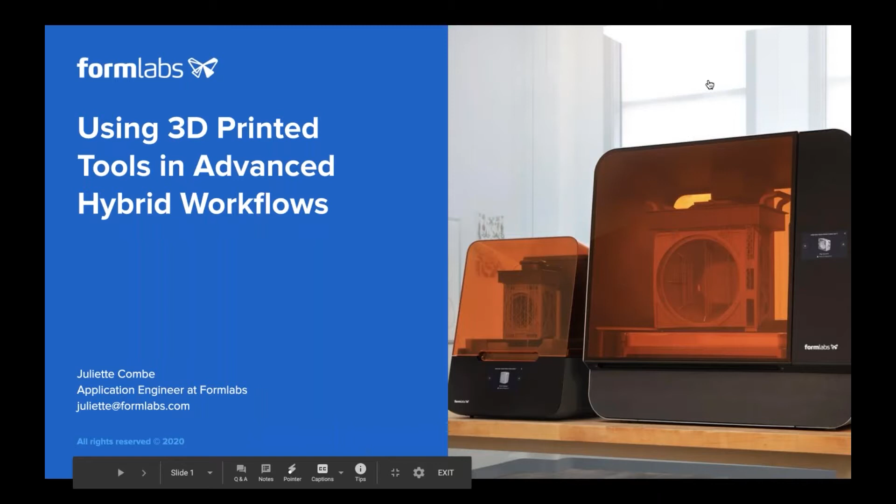Hi everybody and welcome. So thanks a lot for this introduction, Torsten. Yes, so I'm at Formlabs. I'm an application engineer. I'm in 3D printing already for a couple of years, and today I'm doing some research on application workflow, so testing in-house and with customer workflow for new applications for manufacturing and engineering using 3D printing in those industries.

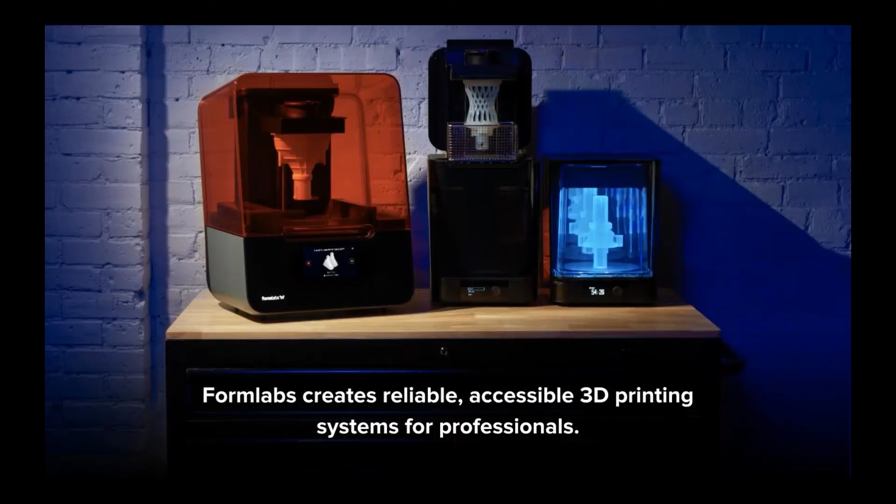So what are we doing at Formlabs? We create reliable and accessible 3D printing solutions.

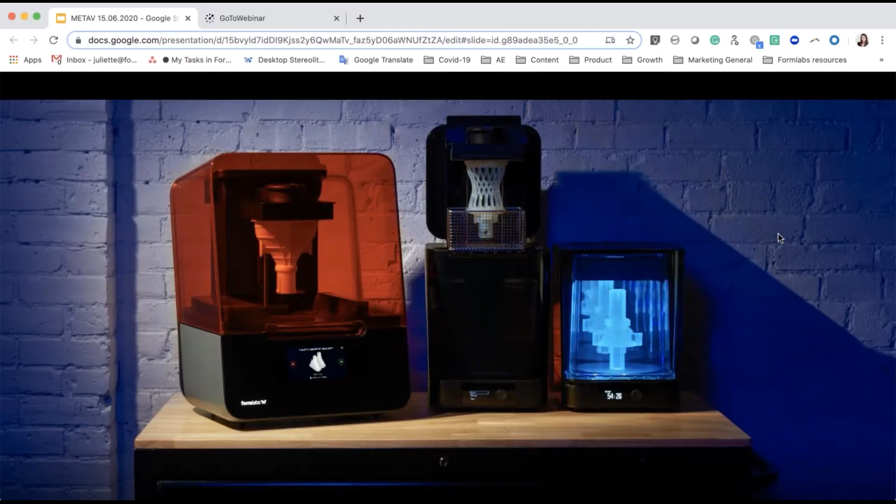Oh, sorry, I cannot switch anymore. Sorry, I just lost the page.

Yeah, that's good. And yeah, we started the company in 2011 out of MIT Media Lab, and now we are more than 600 people. We have 6 offices. The general headquarters is in Boston. The European headquarters is in Germany, in Berlin. We have 3 factories, USA, China, Hungary, and we have hundreds of engineers and scientists.

We manufacture in-house our hardware, our software, and also our materials, SLA materials. So we also have material scientists in-house. And we have sold more than 50,000 printers in more than 40 countries. So this really puts us as market leader for professional 3D printers.

So today I want to talk about first what's our Formlabs solution for manufacturing, and I will give some concrete examples of applications on how to use 3D printing for manufacturing tools. First, 3D printed jigs and fixtures for work holding and finishing, 3D printed molds, and 3D printed dies for sheet metal forming.

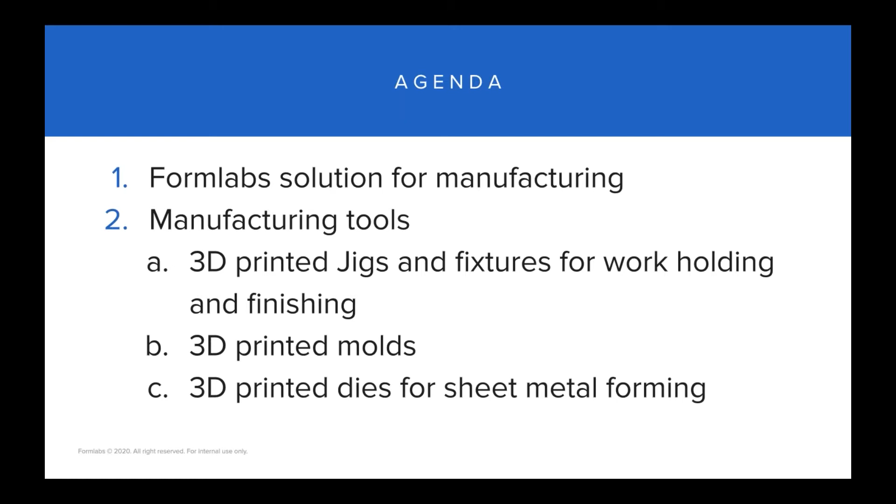So first, an introduction on our product and how manufacturers are using it right now. This is a portfolio of our product. We have 2 different 3D printing technologies, stereolithography technology, I will refer to it as SLA, and a selective laser sintering technology, the Fuse 1, which is still in development.

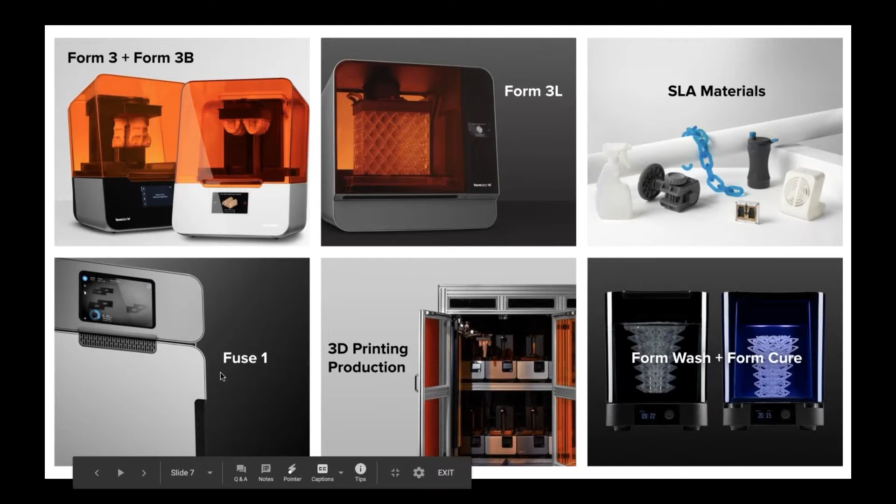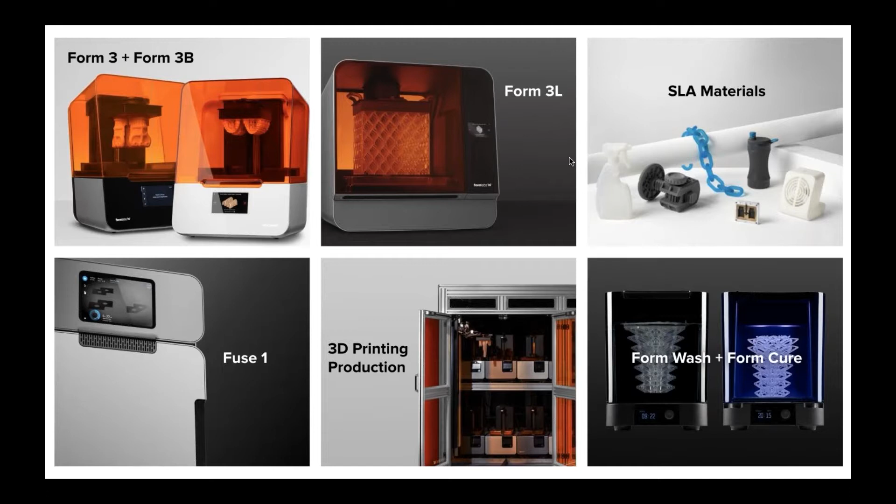Today, I'm going to focus on SLA technology, which is our core product with the Form 3. We also have the Form 3L, which is a large format of this technology with 5 times the build volume of the Form 3. And also, as I said, we manufacture in-house our SLA materials and our post-processing units.

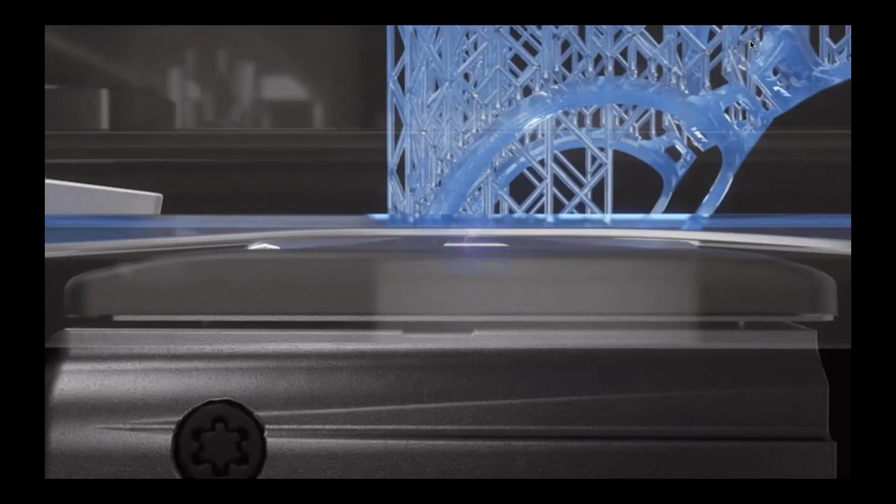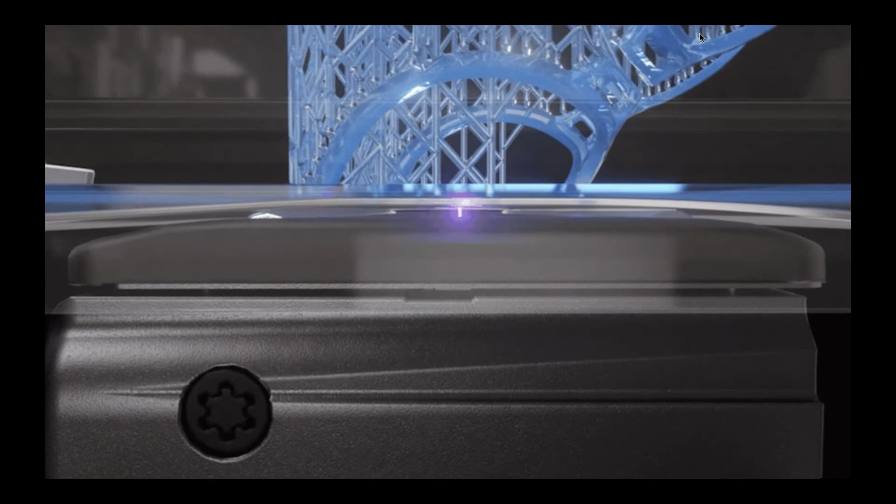So, quick introduction on SLA. I don't know if you're familiar with the process. It's a resin-based process. On the printer, we have an optical system with a laser that comes to a tank of liquid resin and solidifies the resin layer by layer. So the solid part is built layer by layer from photopolymerization.

So the resins are very important in this process, and at Formlabs, as I said, we manufacture them in-house, and we developed different mechanical properties and thermal properties as well for those resins. We have a whole range of different kinds of resin for standard products, but also dental products, healthcare, and special resins. And we have some engineering resins that have technical properties and are very useful for manufacturing applications.

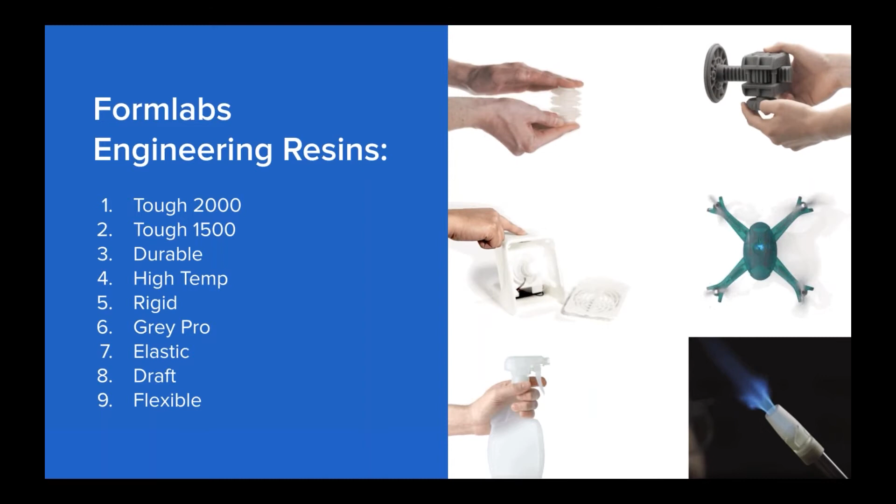In particular, our Tough and Durable resins family are very interesting. We released those materials very recently, actually. The Tough 2000 and the Tough 1500 are some of our latest materials. They are some of our most robust and most functional materials in our library, and are very useful for prototyping, jigs and fixtures, functional prototypes, connectors, and also parts that handle wear and tear. They're very good choices for that.

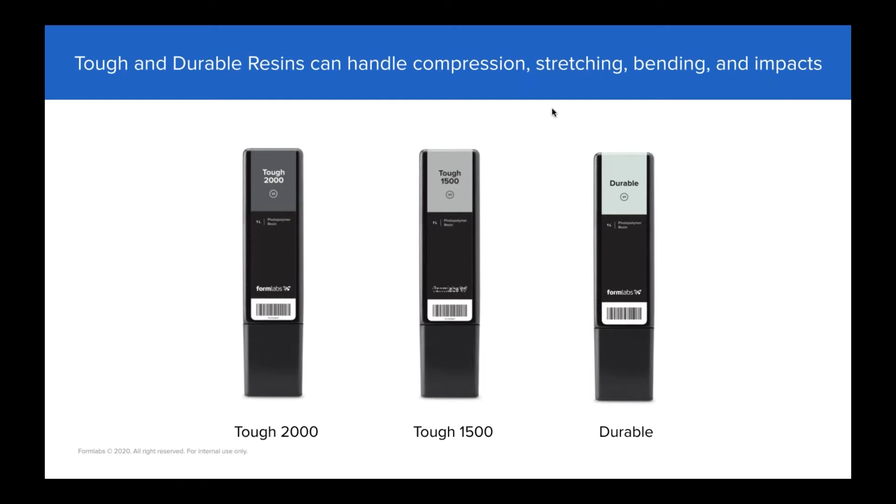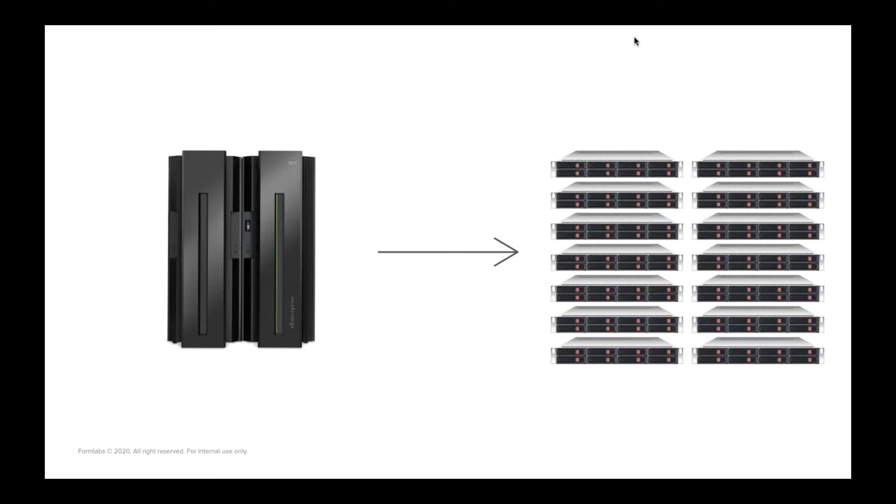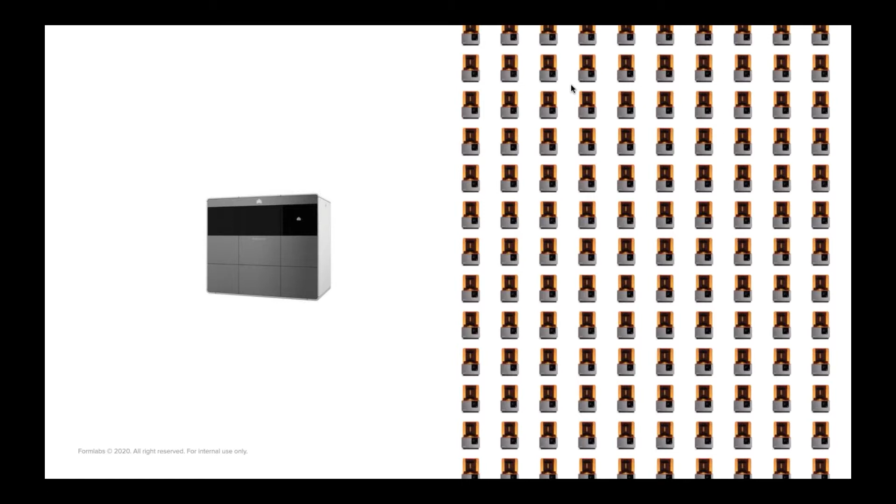For this price, you could have about hundreds of Formlabs printers, and you will have much more flexibility and modularity. So the idea is really to take the power of industrial SLA and bring it to the desktop with small, affordable, and modular units. So we have customers that are building what we call modular 3D printing production in-house on the factory floor. So it allows them to have a lot of scalability and flexibility.

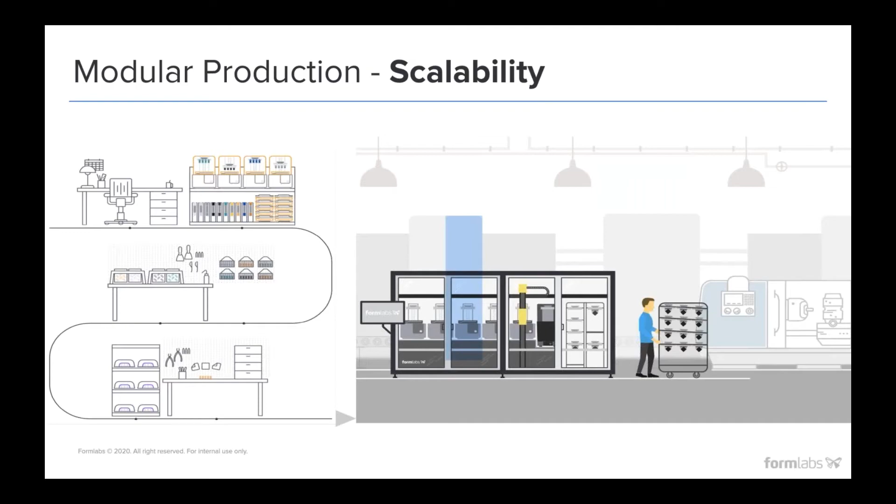So you can start with a couple of printers, and as you discover more use cases, more applications in the factory, then you can scale and add incrementally as the demand grows and the market changes. So this is really how we propose with modular production to do agile manufacturing.

We have a lot of customers that will have a modular 3D printing production on the factory in the assembly, like next to the assembly line, and then also at departments like prototyping or product design. Also for maintenance, so in different departments, so that really gives a lot of flexibility in the product development process.

So the topic of this conference is really about digitalization. So additive manufacturing fits very well here, and it's a really great tool for digitalization for industries. If you're familiar already with 3D printing, you probably know that it's very useful for prototyping, pre-production, communication models, and manufacturing validation. Also end-use parts are very popular, like mass customization and short series.

Today I want to talk in particular about production tools and production aids, so how to use 3D printed parts as a step in the manufacturing process. So this is what we call hybrid workflow. We use a 3D printed part as an aid in the manufacturing process. So it's not about replacing traditional manufacturing processes by 3D printing, but really enhancing this process with the flexibility of 3D printing.

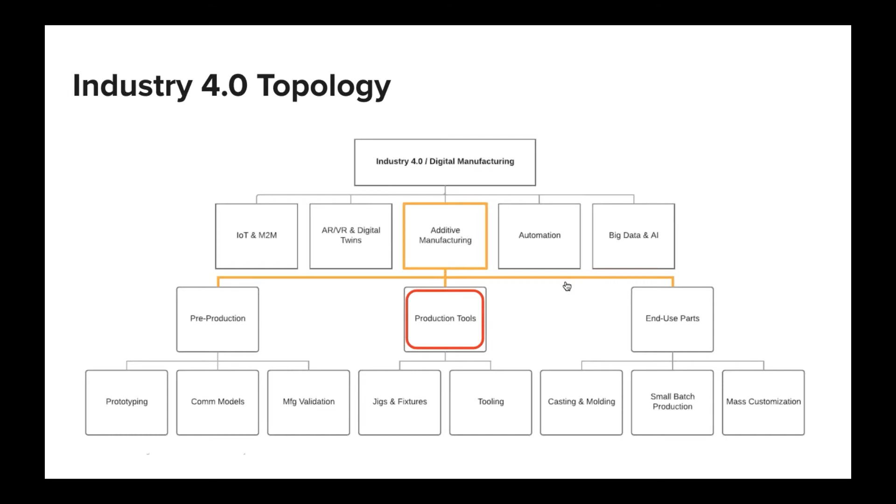So I'm going to give a couple of examples of applications on how customers are using SLA parts today, how they're using a printer in hybrid workflow. For each of these applications, we have some detailed webinars and white papers about it. So if you want more technical details and to dive deeper into those applications, I really recommend watching the webinars and the white paper for each of them.

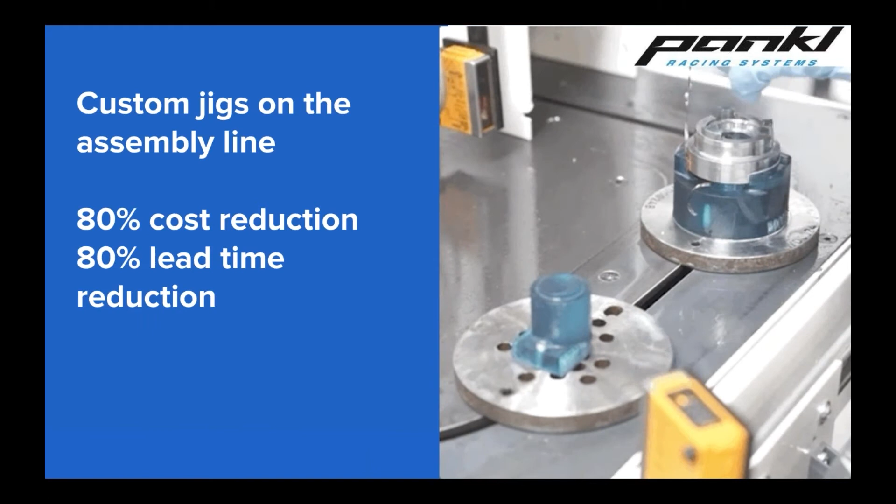But right now, I really want to give an overview to let you know what is possible to do and what our customers are doing right now with SLA printing in the factory and as a step in manufacturing processes. So first, I want to start with using 3D printed jigs and fixtures in the factory. So this is an example of a customer from Austria that is called Pankl.

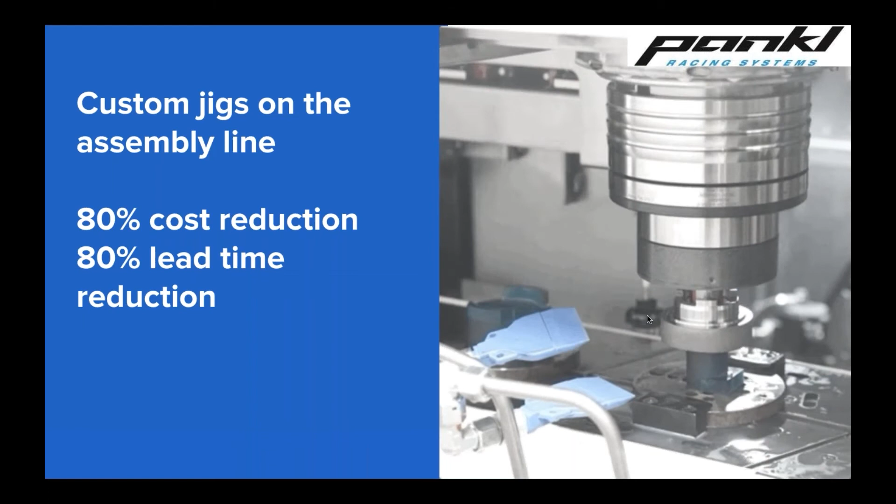They are manufacturing drivetrains for automotive companies, and they were facing the challenge of having to produce thousands of custom jigs for a single assembly line. And with 3D printing, those parts that you can see here in blue that they put in the assembly are printed with the Tough resin that I was just talking about before. So with 3D printing these, they managed to reduce cost by 80% and lead time by 80% as well. So this was a really great added value for them.

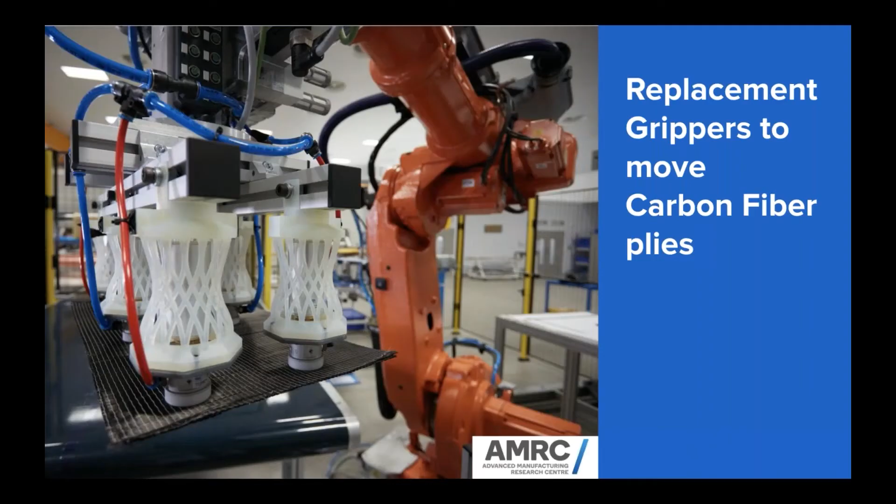Another example is from the Advanced Manufacturing Research Centre in the UK. They were on a project that was under really strong time pressure, and they had to find a replacement part for a robot, so replacement robotic grippers. And this was for a project manufacturing carbon fibers. So they had to align plies of carbon fibers in a very precise way.

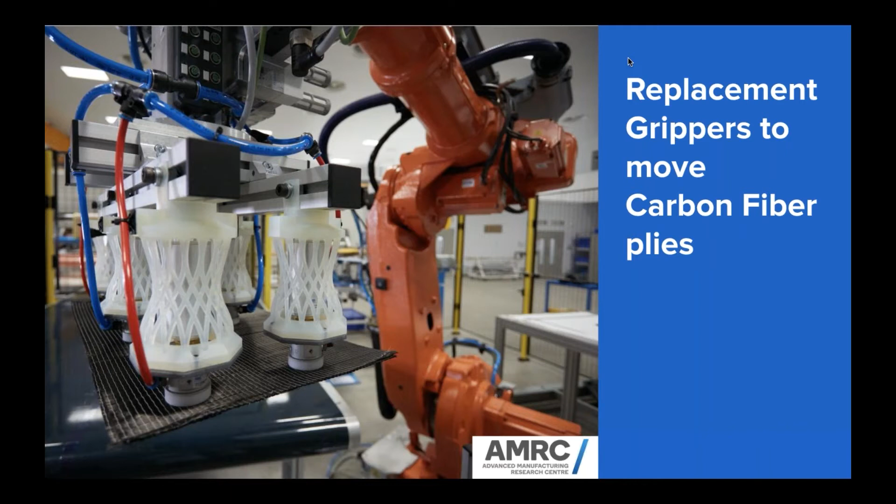And they actually played on the design advantages of 3D printing, so being able to fabricate a specific lattice, and also the different properties of the material. So they needed some stiffness, but also some flexibility in the material to have the precision of the gripper. So they managed to do that with the material and the lattice.

Another example from the Advanced Manufacturing Research Centre was in the process of filament winding. So they were using custom jigs to have the different sizes of filament passing, so just some custom rollers that were also printed with the Tough resin. And this really allowed them to have great flexibility in the different filaments that they were using for this process.

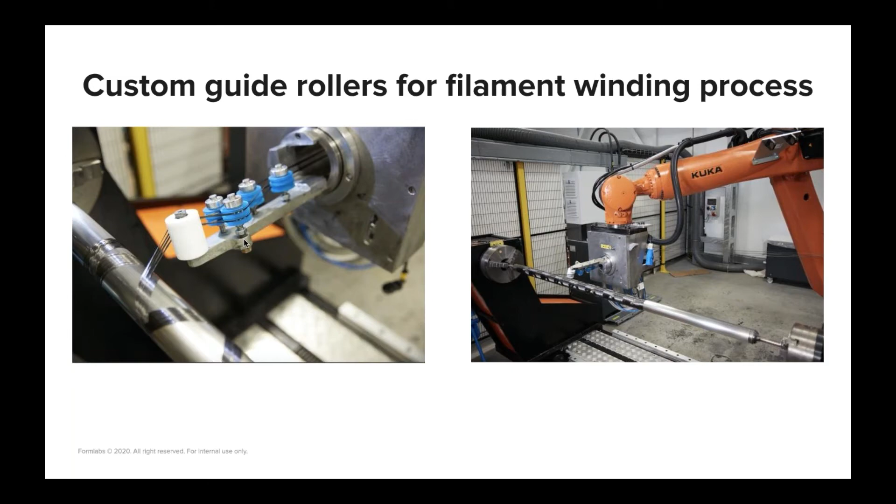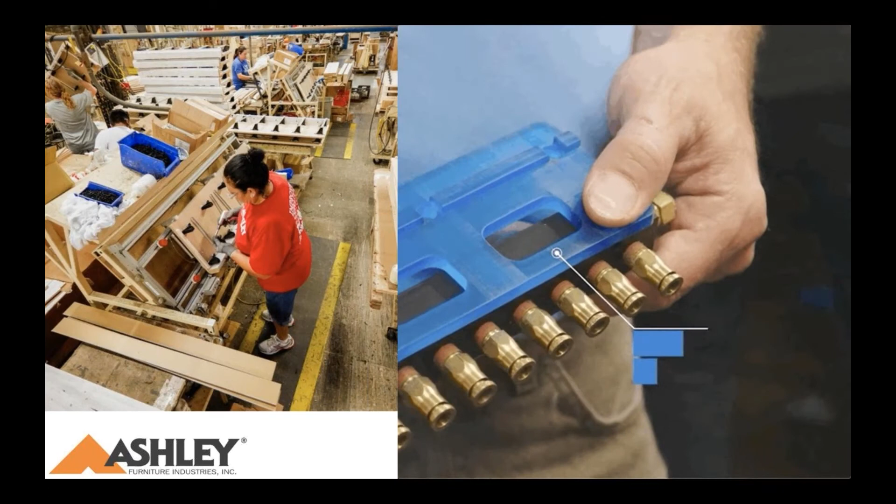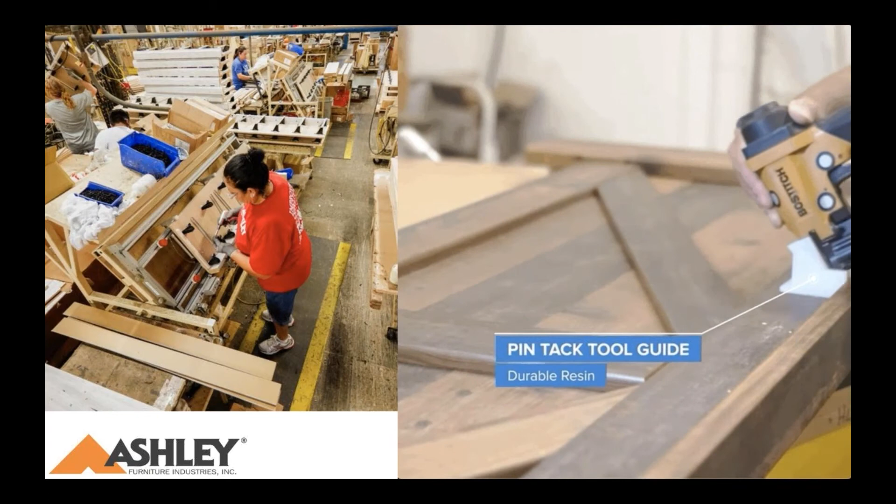This is an example here from Ashley Furniture, which is one of the leaders in furniture manufacturing. They are actually using 3D printing on the factory floor. They have a large inventory system for jigs and fixtures and replacement parts in the factory. And they have set up more than 700 printed parts in the factory for work holders, part replacement, any kind of tool that was basically improving efficiency and labor.

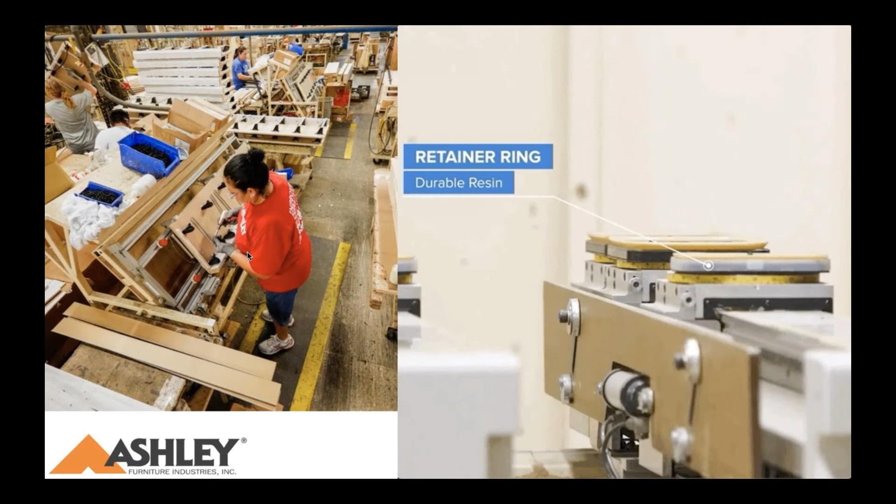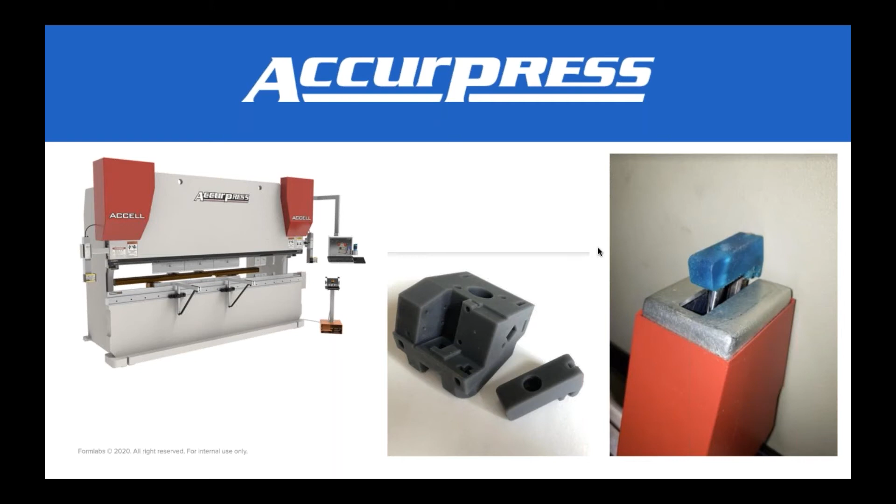So this is to talk about how to use jigs and fixtures or 3D printed parts for finishing. For masking, we have customers in automotive and aerospace using 3D printed parts for the masking process. This is really interesting because manufacturers traditionally use tape for that. They will just use tape when they need to mask some parts when there is a treatment to apply. So for example, coating, paint, powder coating, or anything abrasive, any plating or bonding process.

So when it has to be applied on one part but not everywhere, traditionally we would use tape, and now we have customers that are using 3D printed parts, and it works very well because it's really scalable. It's something you can take in and out, and it really reduces labor.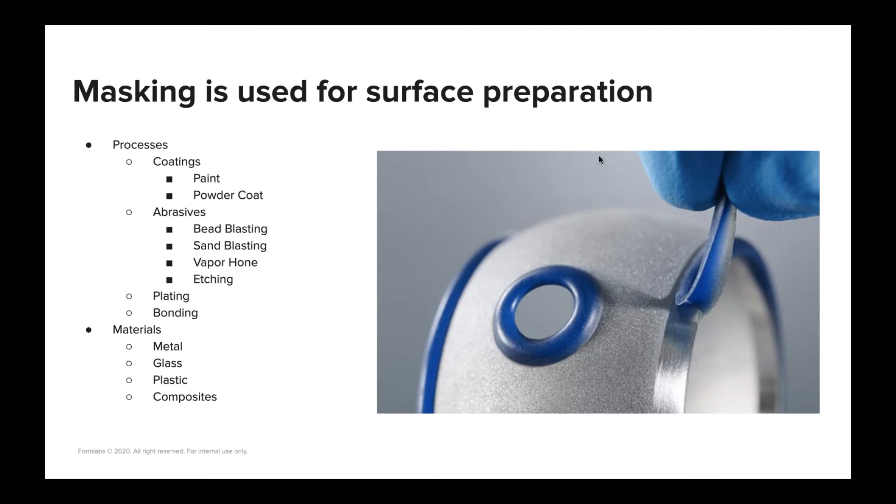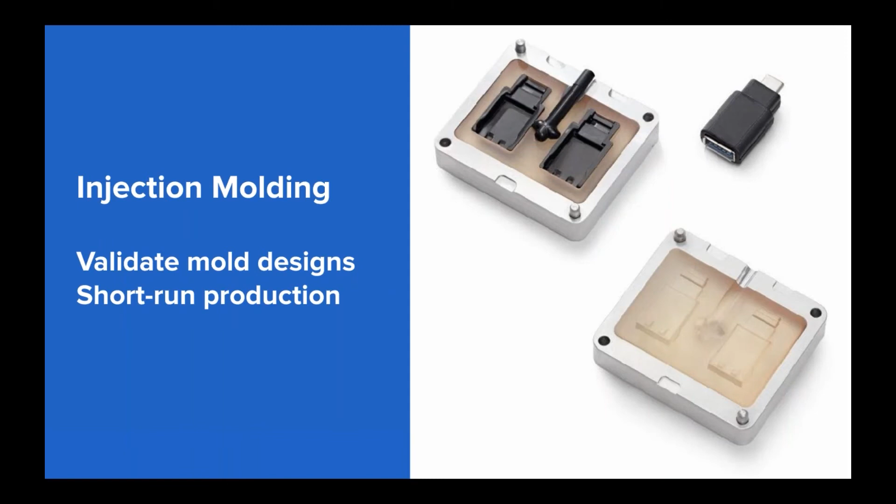So now I want to talk about how to use 3D printed molds for manufacturing validation and short run production. In most manufacturing processes, committing to tooling will be the first pain for lead time and cost. This is why we propose finding alternative tooling methods. For example, with injection molding, we have customers that are using our material to actually validate a mold, either to prototype or test a mold before committing to manufacturing an expensive mold in metal or in plastic, but also for short-run production.

We have a special material, not from the Tough and Durable family, called High Temp material. It allows you to go to very high temperatures, and this allows customers to do injection molding. The number of iterations really varies depending on the geometries and the injection pressure in the machine and so on. We have done some tests, and we have customers that go from a couple of iterations to maybe 50 iterations. We would recommend using it for under 10 iterations, probably to test the mold.

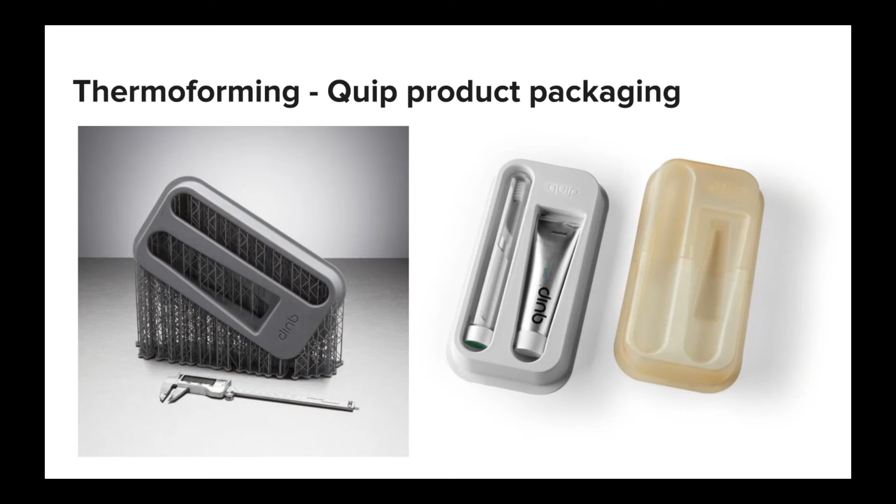We also have customers using this High Temp resin for thermoforming, creating molds in particular for packaging. This is one of our customers called Quip that makes toothbrush products and is using this for packaging.

Silicone molding: we have a great white paper about silicone molding, so I'm not going to go into detail right now because the process is quite long to explain, but we have a few different steps and 3 different methods to be able to do silicone molding. One is compression molding. We also have casting processes for silicone molding, and also overmolding.

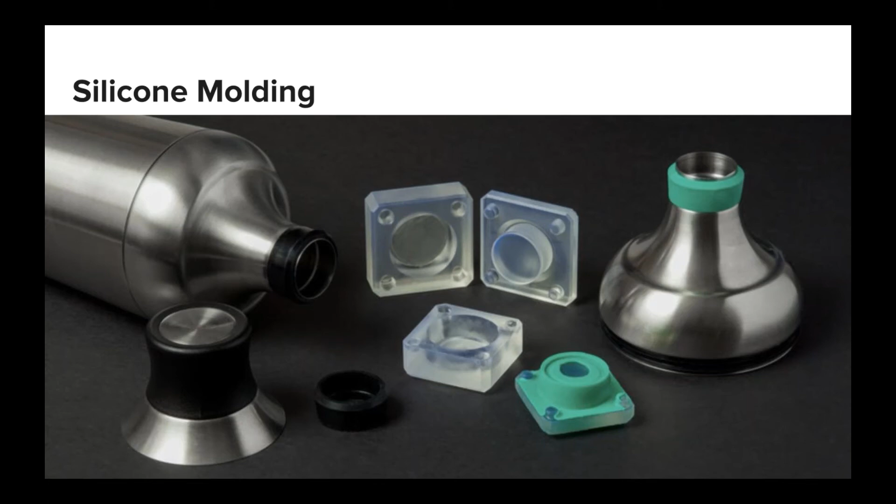Another application I want to talk about is composite molding. This is an example of a case study where we have a customer, Delta Wing, that was producing aero part components for a racing car company called Panoz. And they have tried 2 different processes. One process for composite manufacturing is printing a pattern. You can see on the left side, it's again printed with High Temp.

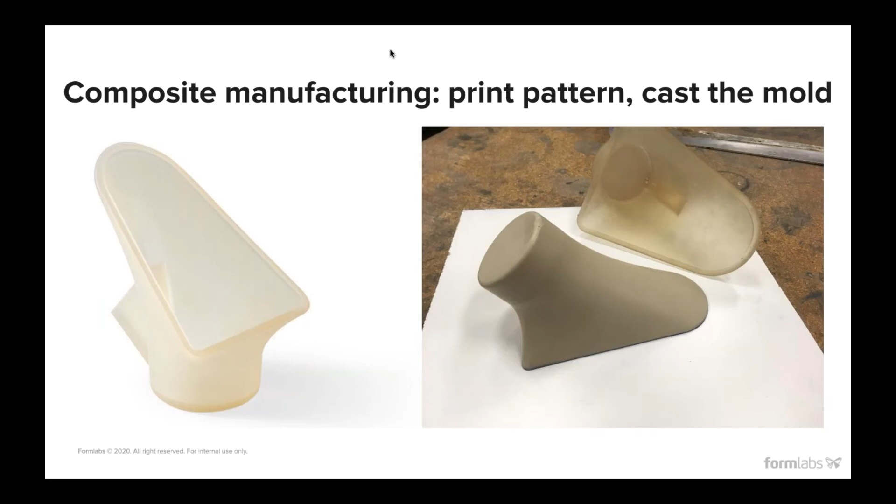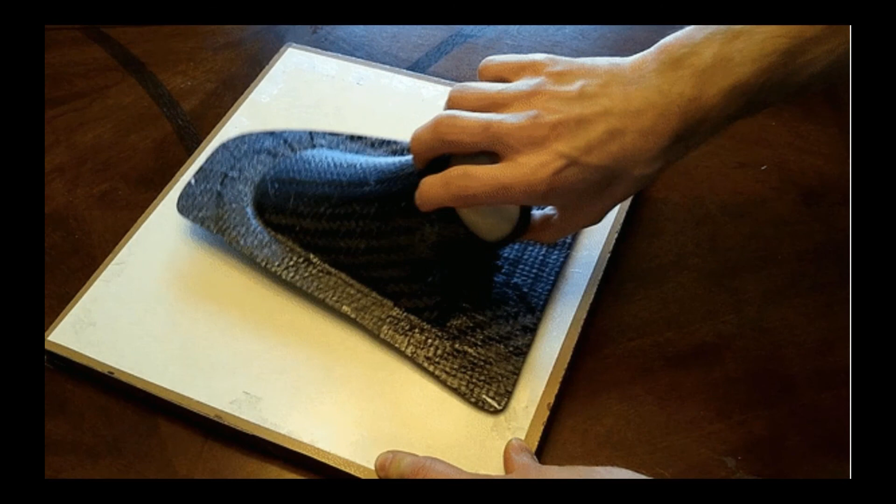The concept is to print a pattern, then cast a mold from the pattern, and then apply the traditional composite molding process. So you cast the mold, and once you have the mold, you apply the carbon layup, the prepreg layup process, then the vacuum bagging and demolding, as you can see in this picture, and finally it is trimmed and assembled.

And this one was interesting because they only needed 6 cycles for this part, only 6 parts. So they could directly print the mold. They print it in 2 parts, and they could directly apply the vacuum and autoclave curing process.

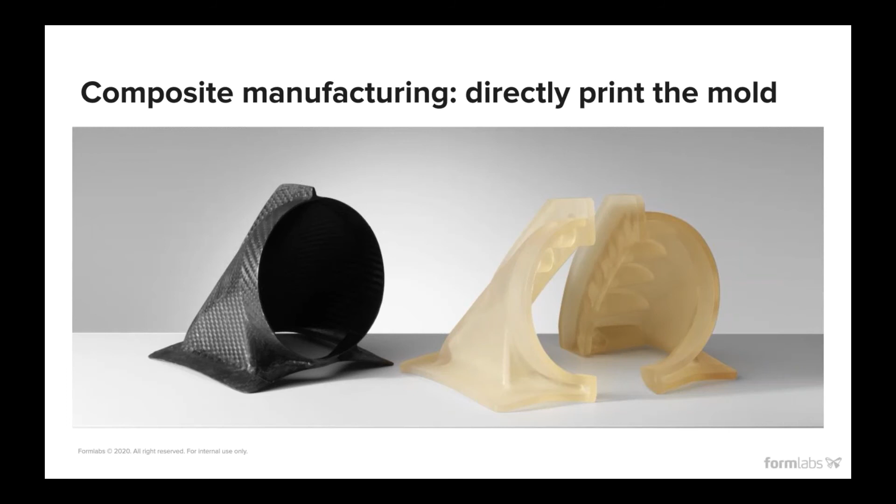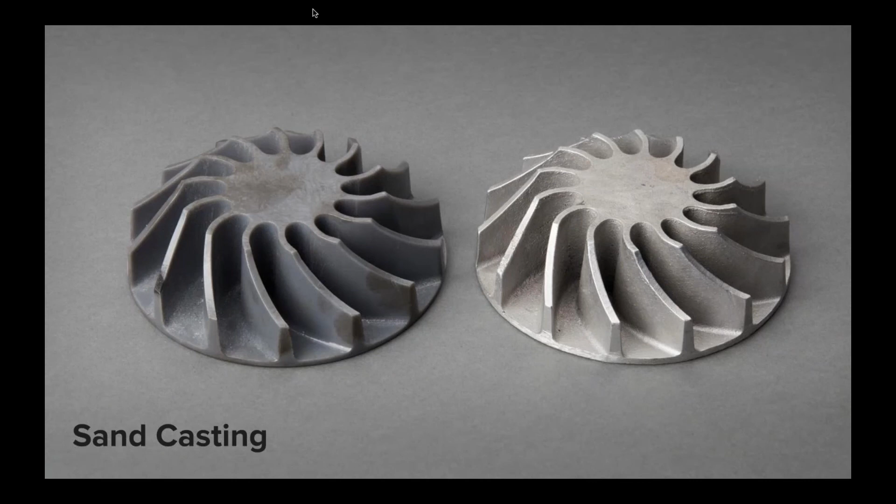We also have some resin that are used to do direct investment casting, in particular for jewelry, but also for industrial casting. So we have a resin called castable wax, which really works as a usual wax used in jewelry, and this allows to really manufacture metal parts. Same with sand casting. We have some application using sand casting in the process of doing metal parts.

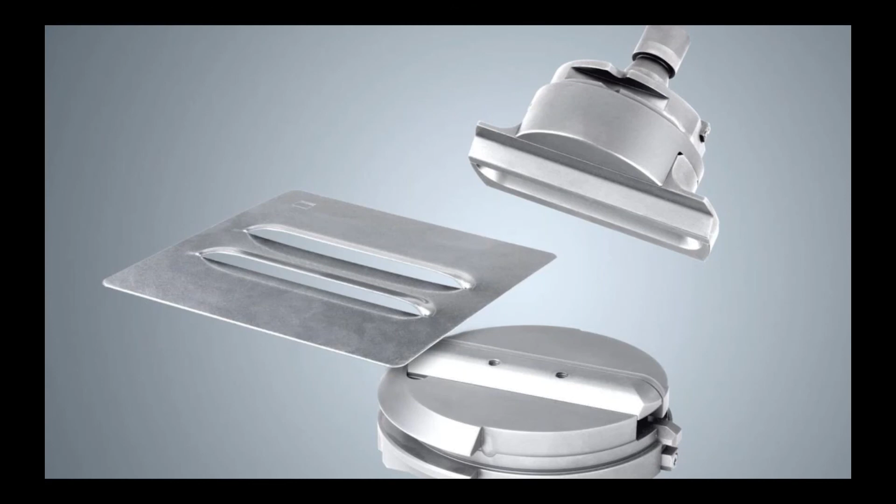And still in the metal manufacturing area, now I want to talk about forming sheet metals with 3D printed dies. It's quite a new application that we're presenting. We have been doing a webinar about it a couple of weeks ago, so a very interesting webinar. The idea is really to replace a metal die used in sheet metal forming with a 3D printed die.

So sheet metal forming is really everywhere in our daily life. We have sheet metal parts everywhere. It's a very cost-effective method. There's very little material waste. And here you can see on this picture a sheet metal louver. This is just an example. And again, as for other injection molding process or carbon fiber layup, the tooling part is always generating a lot of cost and a lot of lead time.

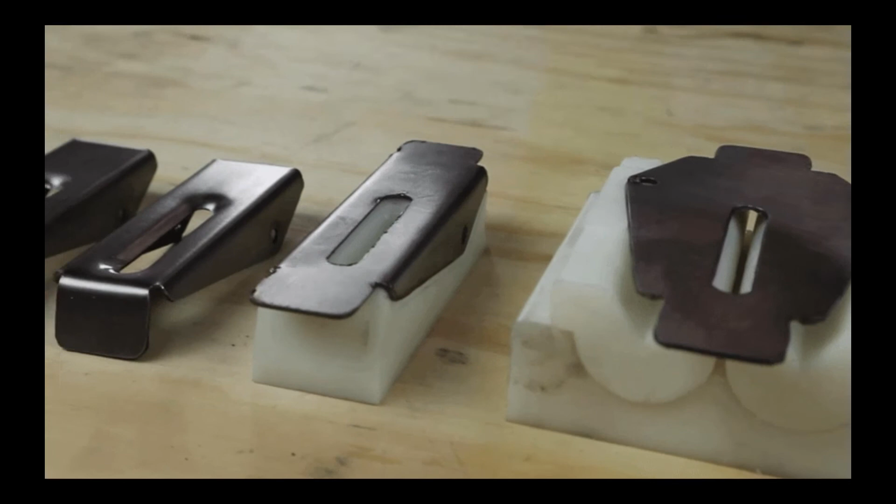So we have a lead engineer in house that has tried some tests to propose alternative method in tooling, tooling with 3D printing. So you can see here on this little video, this is an example of a part that he has done, which is a blade guard of a sawzall, actually electric saw. And you see this is a pretty simple design that he wanted to try, but has actually a couple of complicated features. So in particular, inside here, there is a formed radius that is not that easy to do with forming.

So in the webinar, he's explaining what are the challenges in designing. So designing will be really the critical part of this process, designing the die for sheet metal bending. It's in general very important for sheet metal bending to design with the right specification. But yeah, he explained everything in the webinar, which is really interesting.

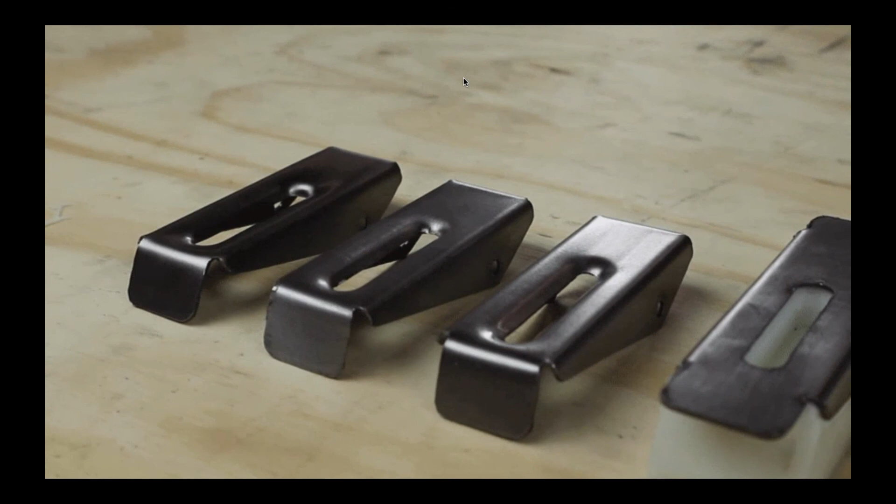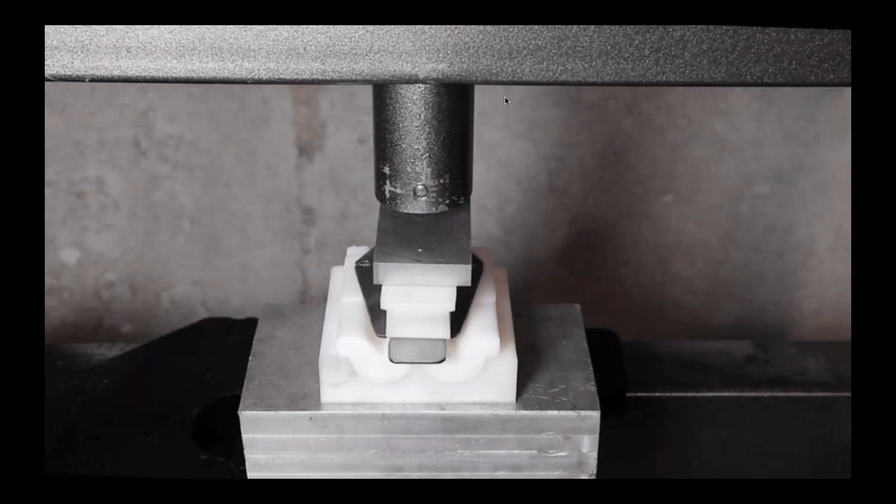And he was using our rigid resin this time. So it's again one of our technical resins, which is our stiffest resin. It's actually probably one of the stiffest materials in SLA and in 3D printing. And it allows actually to really bend sheet metal with this die. So you can see here the process. You have the lower die here and the upper die here. This is the first part to actually bend some flanges around the part.

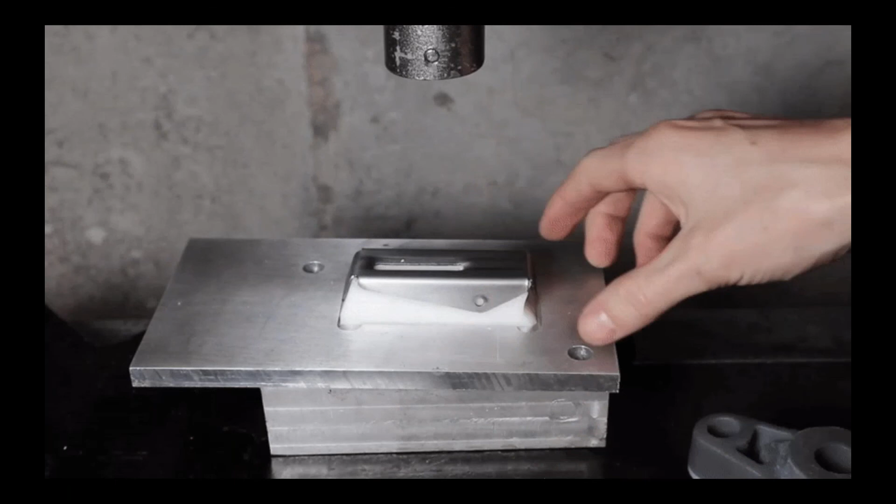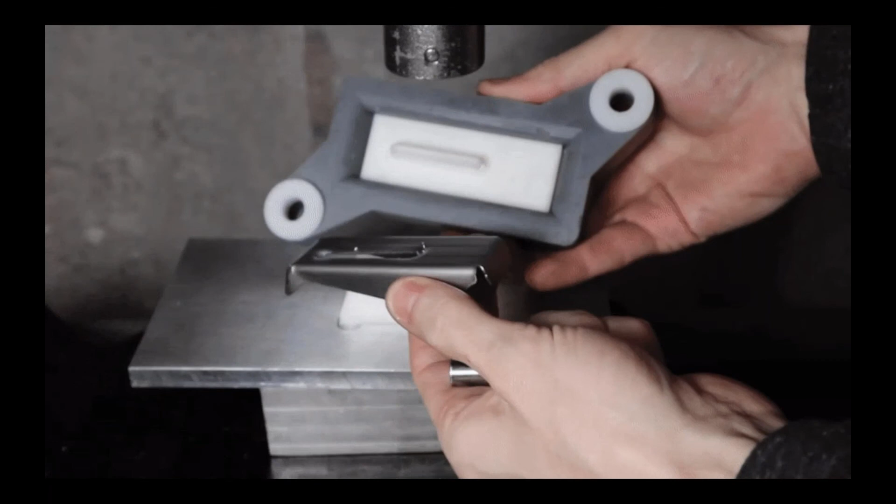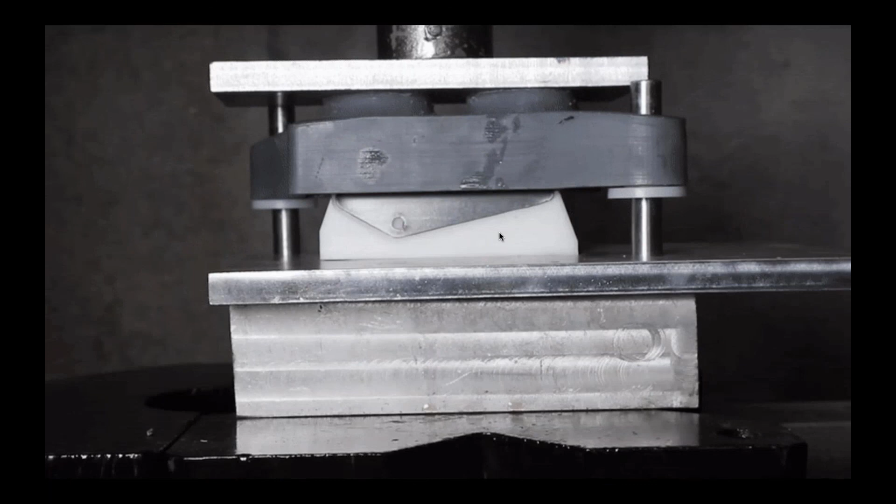And then you have a second step that is to form the inner feature. So how to form an inner radius around a hole. And this is also just applying the dies inside a hydraulic press. And this allows to really create some really good quality parts, so really close to production quality. And this is great if you need to prototype your sheet metal part, or if you need to prototype your die before committing to a very expensive tool, but also for short run production.

So we haven't done yet some tests on how many cycles you can do with one die, but it looks like you could really do a couple of iterations, and that could really be very interesting for short run production, even more than for prototyping. So first prototyping the sheet metal part and the die, but also short run production.